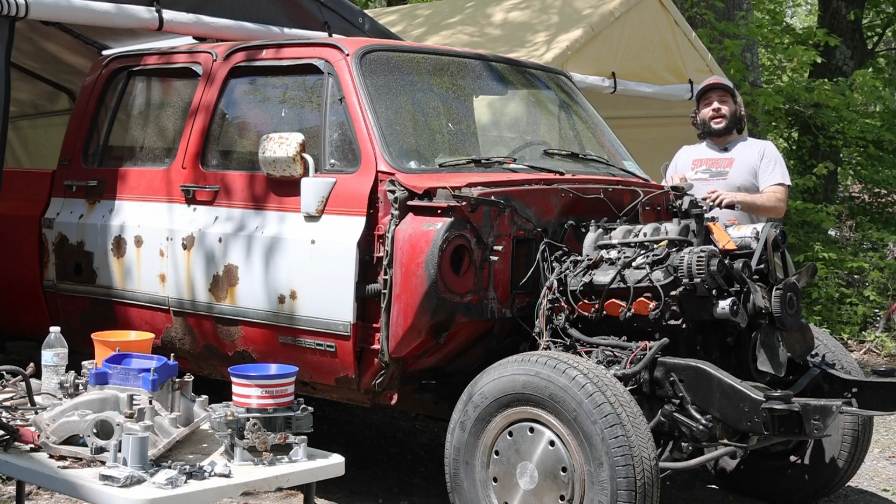In the last video, we were able to get the 8.1 liter Vortec and Allison transmission into the actual truck itself, but unfortunately, we weren't able to get the transmission bolted in. It clearly was not meant to be in here, but that's okay. What we're gonna go ahead and do is finish pushing this thing out of the carport, and we're gonna go ahead and design and manufacture our own transmission cross member for the Allison 1000.

That being said, it rolls pretty easy. Sort of. Oh. There we go. Yeah. There we go. It's going to be a pretty quick and painless endeavor, I say now.

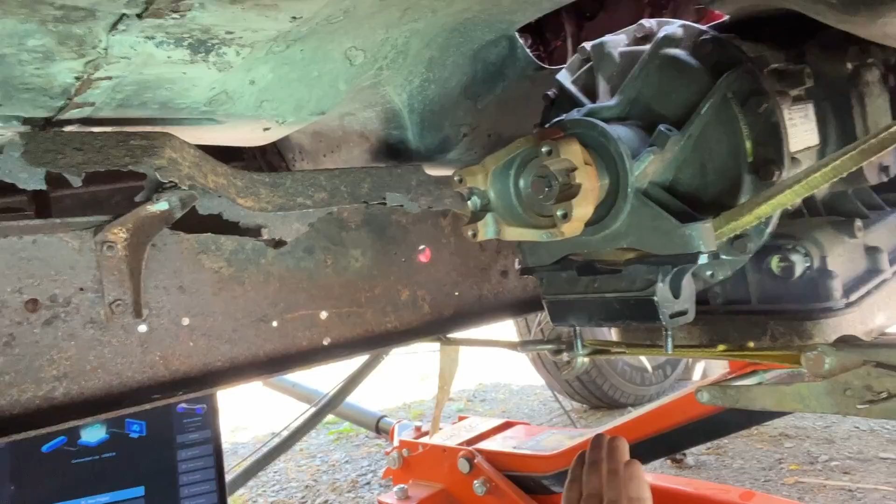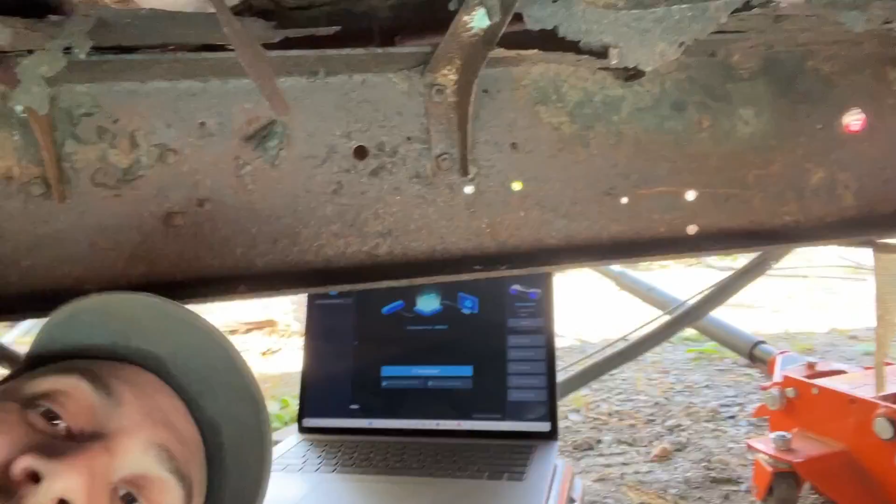All right, guys, we're underneath, and as you can see, we have the transmission sitting right there and a computer sitting right there. I actually had to steal the wife's laptop because my laptop for tuning computers can't do scanning. It will literally freak out. So I use my desktop for the actual designing process, and for scanning, shout out to the wife for letting me steal her laptop.

Anywho, here's an old trick that I learned back, I don't know, 20 years ago from an old timer. Take a ratchet strap to support your transmission so you can move the vehicle around and everything. But yeah, if you didn't know that, that's how I do it. Now that we're going to be taking stuff off and everything, you just, you know, secure the transmission.

Anyways, so the first thing we're going to go ahead and do, now I had a lot of troubles with this. This is the Creality Raptor, just the standard Raptor, not a Pro, nothing like that. And this does both laser as well as LiDAR or infrared scanning. Now, for smaller projects where you're trying to reproduce a part or something like that, the blue laser is amazing. The accuracy, so good.

Now, again, this is not an endorsement per se. I bought this with my own money, and I had an absolute nightmare to get the thing working. It took 2 days, and I had to go to my mom's house and use an Android phone to do an update on it because out of the box it doesn't work. So hopefully they fixed it. I mean, it was a problem that was known for about 3 months.

So if you're buying a 3D scanner, this is awesome if you can get it working, but be prepared for a headache. They do make other ones, and there's other brands. Now, there was no mention about it on their website, and it was the forums that were able to get the problem solved. Heads up. Anyways, we're going to go ahead and create a new project right here.

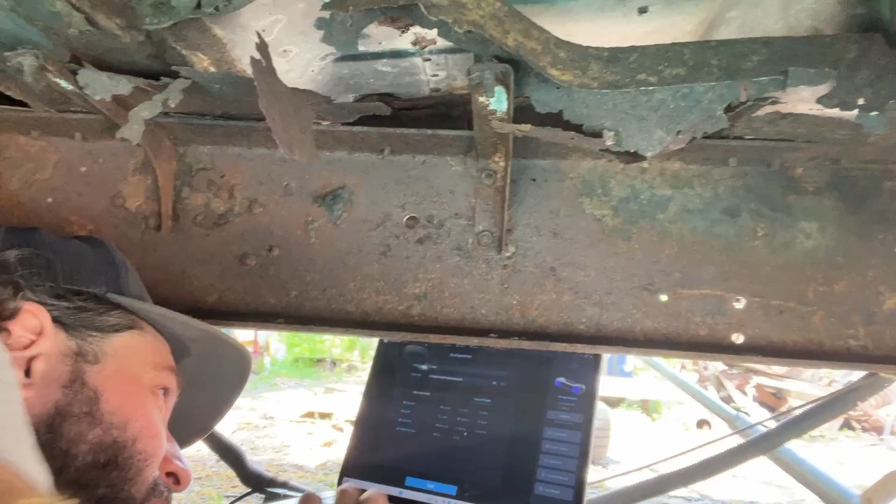We're going to call it trans. There we go. We're going to move over to this thing. Oh, and we're going to use the infrared mode. We're going to do medium, no markers, geometry, and disable the flat base. The flat base is designed so if you're scanning something on the floor, it won't read the floor. That being said, don't enable it.

It is buggy as hell. It doesn't work, and it will make trying to scan anything an absolute unmitigated nightmare. So make sure it's disabled, and we'll go ahead and start the scan process. It'll initialize, take a few seconds, and you're going to be able to take the scanner. Make sure you use the little hand lanyard thing, because if you drop this thing and it hits the ground, it'll mess with the calibration.

And you can see we put that towards the transmission. This is actually up, so you put it towards the transmission, and you can start seeing that the green is good. Green means it has a nice visualization on range and everything, and you'll start being able to scan it. Now, to start scanning it, you press this little button once you're happy with what the color is. And I'm using my phone to actually see that, and now it will start to scan.

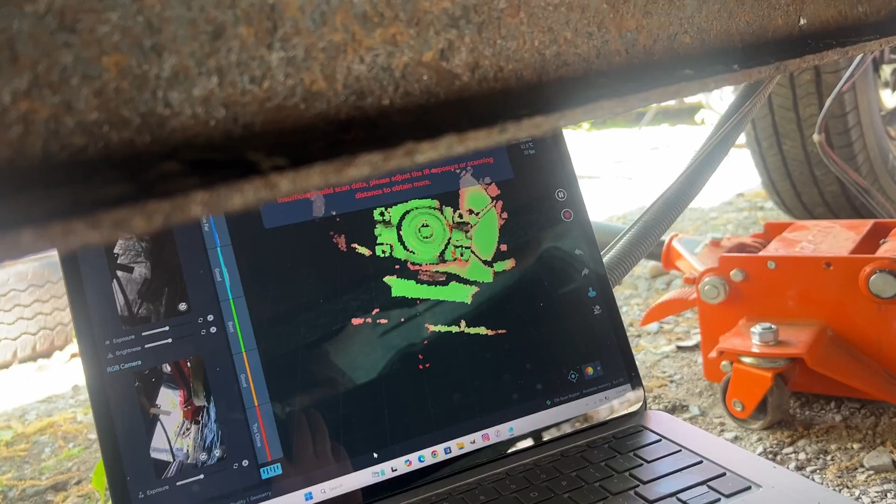This is inverted. It's weird, and it does a really good job. I've been using it for doing the super stuff. And let me turn it around so you can see. All right, this is a little bit difficult, but you can see what I've already scanned. And if we look over here, pull far enough back, you can see the color change on where the little play button is. Once it gets in a nice position, it will change the color. If you're too far away, it'll turn all different colors, right?

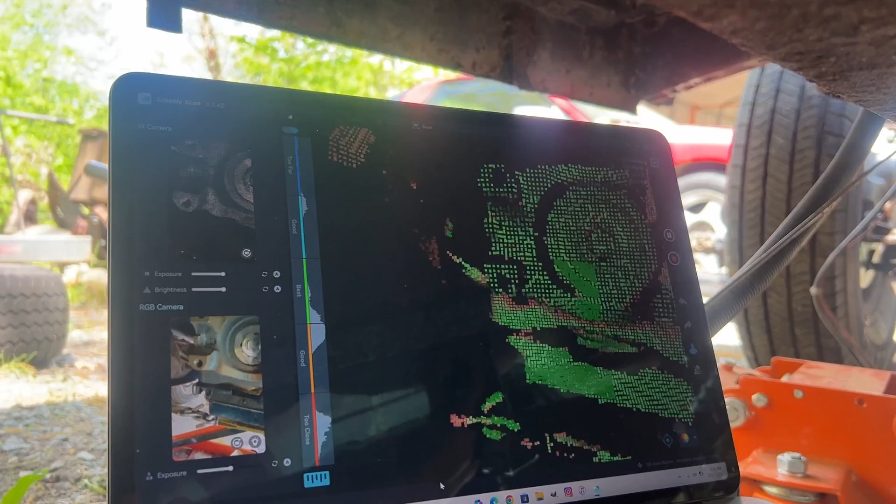You can zoom in and increase how much information you get based off exposure and stuff like that. So if you're watching over here, it'll physically zoom in like you're zooming a camera, so you can see what you're doing a bit closer, but this has to be further away, you can do that.

You're going to start scanning the whole thing, and you want to get as much detail as you possibly can, changing the angles, because you're literally creating a 3D representation of the entire thing. It'll yell at you a bunch, but you get the general idea. It's probably going to take about an hour to scan everything, since it's a bit finicky.

Once I'm done scanning it, we'll go into the house, upload it onto my desktop computer, and we'll be able to render it out and use it in a CAD program. Once we have the CAD program open, we'll be able to design the actual geometry, and from there you'd be able to run it through something like a plasma table.

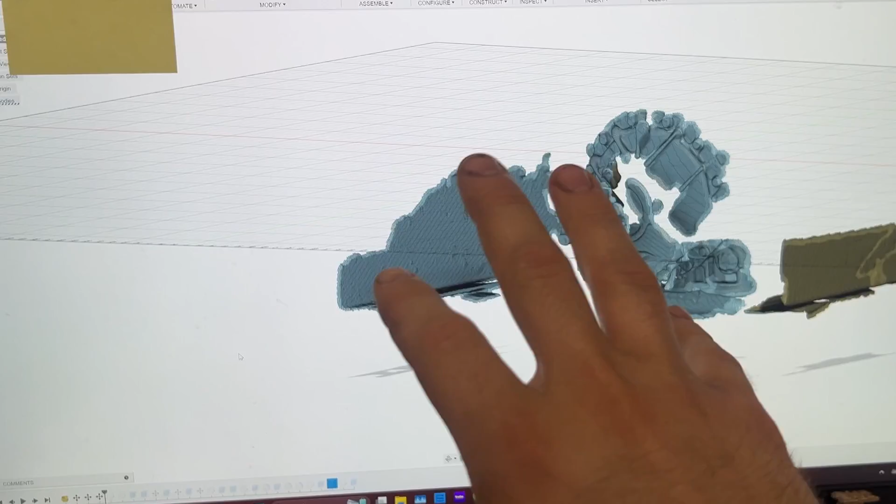We are not that fancy. We're going to go ahead and get the grinder out and just do it the old-fashioned way. So forgive me for not having capturing software, and also how can you see my hands when I'm doing stuff? But this is the environment that you're going to be working in.

You can kind of scoot it around by grabbing it. You can use your shift, and you can manipulate the screen and really get a good idea.

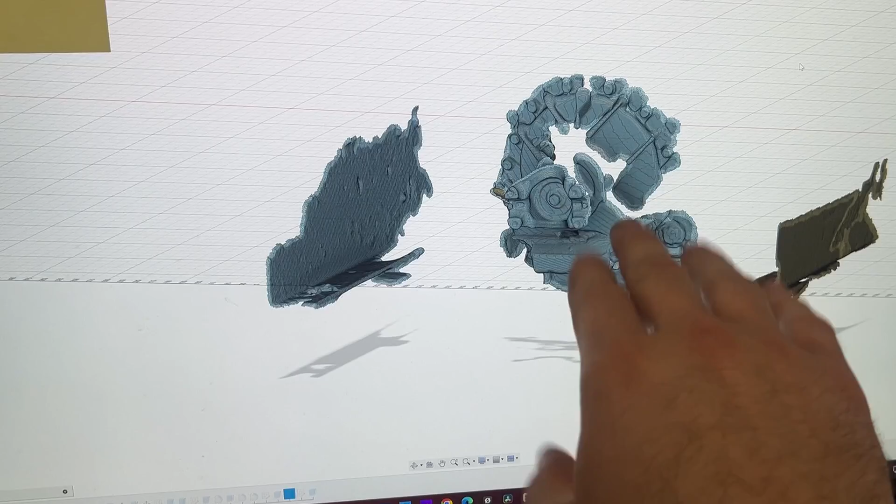This right here is going to be our frame rails. So your C channel is like that, but we just needed to have those surfaces so we knew where we're going to be mounting it. And there's our transmission mount right there. We needed the other stuff so we knew what we were going to hit and what we're not going to hit, and then we can start playing with different ideas as we go.

First thing we're going to want to do is draw the tube. This is where we're going to be able to mount our brackets to, and this will give us an idea how close we can get to the transmission mount.

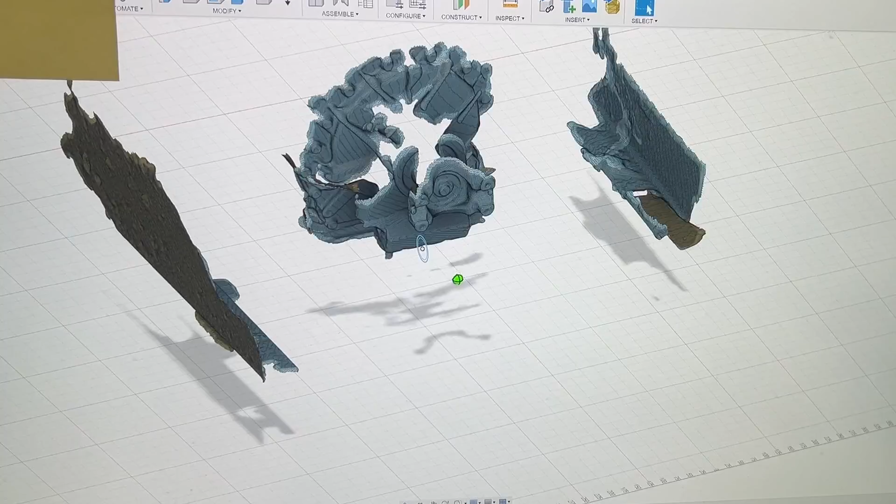If you want to see how that looks, we can actually open up that drawing here, and we can go ahead and hide the mesh from that and really get a good idea.

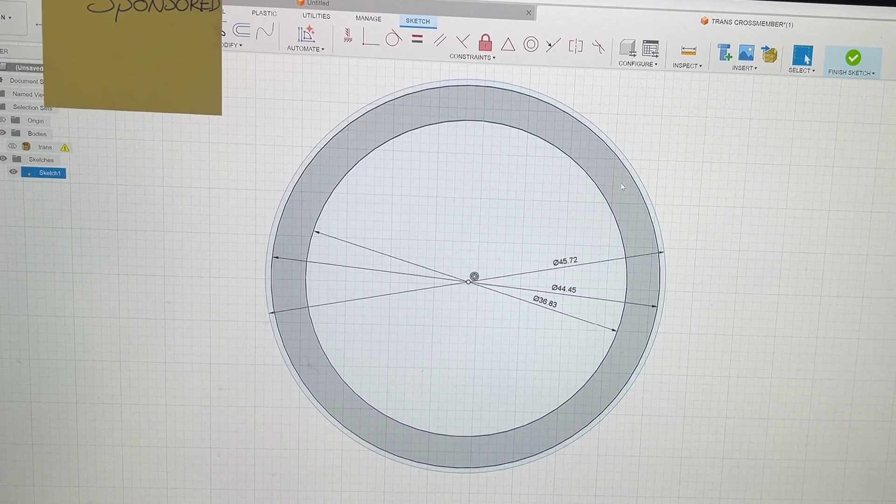So we have three circles. The inner is the inner wall, so this is the void, if you will. This is how thick the actual tube is, and this is a little bit of extra space to allow you to put the tube through the plates when we get to it and weld them in, so that you're not a friction fit. You don't need this to be friction fit, you need to be close enough for a weld, but not nuts. You know what I mean?

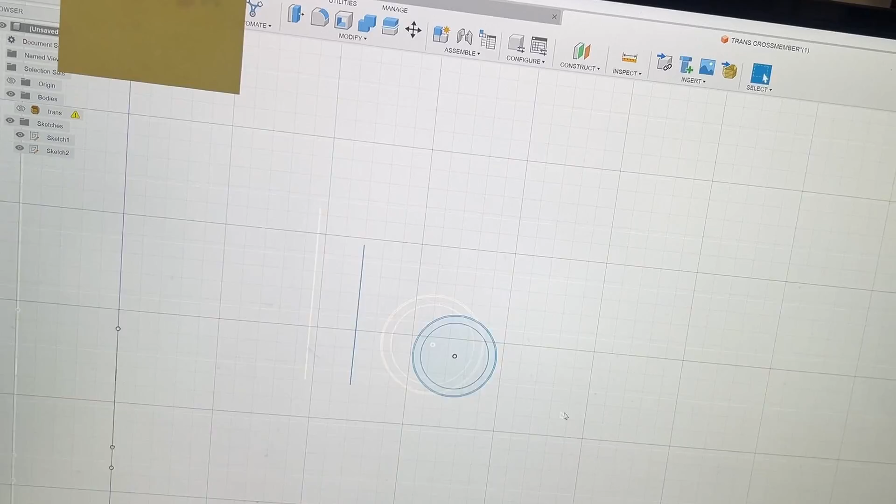Now we can go ahead and exit that sketch and get an idea of our next sketch, which we can zoom out, turn it around, and that is where we create our plates that go to the frame and the plate that goes to the transmission.

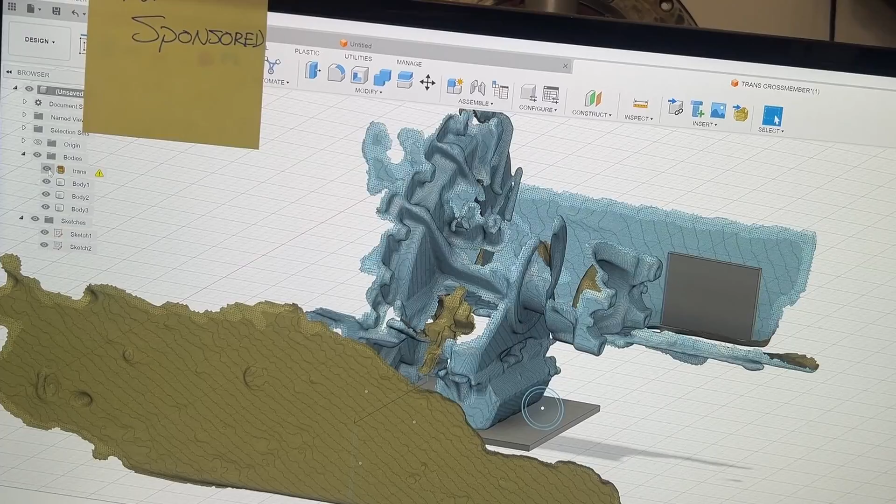So what you can see when we turn that into an actual solid on our extrusions, that's what it'll look like. And again, to get an idea what the space looks like, those are the most important parts. We have our plates and we have our tube mocked up.

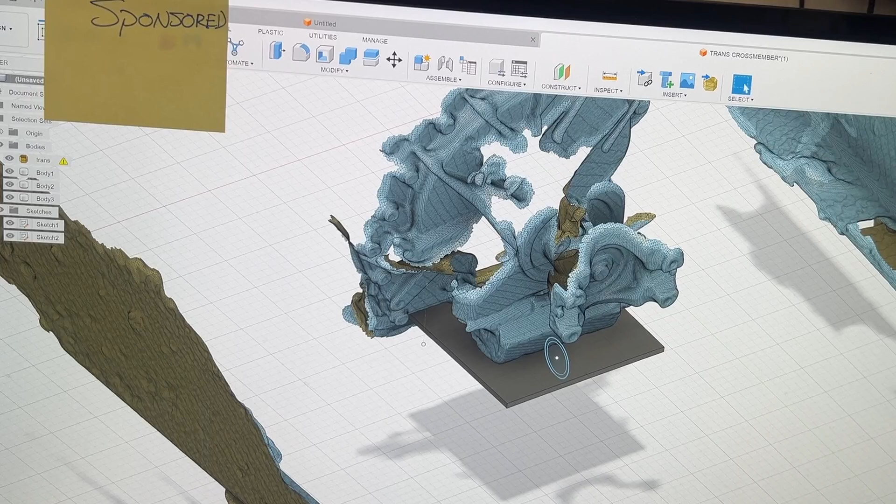From there, we can just move things around until we're happy, making adjustments. We didn't need it so tall, so we dropped it down. Scoot this over a little bit more. And you can start to see things kind of come to fruition.

What we're creating here are the gussets that are going to support the lower bracket from the tube. We can then extrude them, and that's what they'll look like. Now, we don't need that much material, so we can kind of just shave it down a little.

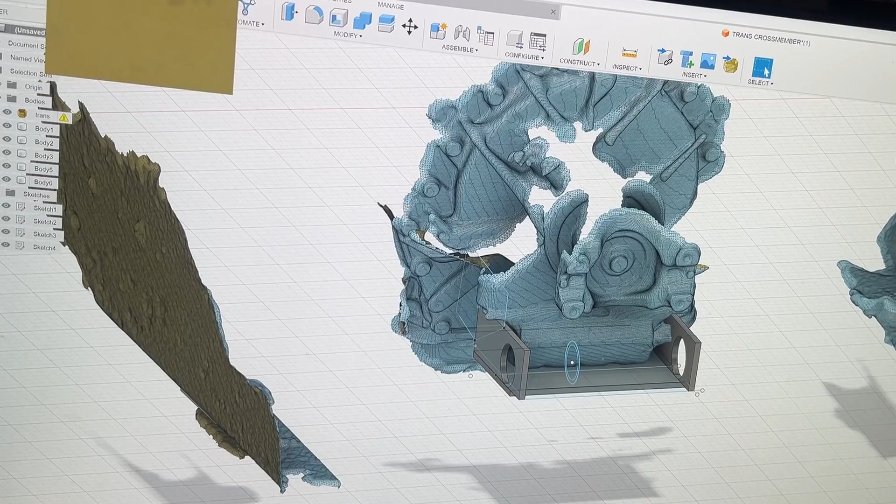Again, you put a drawing, and to show how you create a drawing, we'll just scoot this around and I'll give an example. So you select the face that you want to draw our drawing on, and select the draw thing, which is up over there. This is not sponsored. And you can actually hide the body again up in this corner, put that little eyeball, poke it right in the eyeball, knock it there, it's blind.

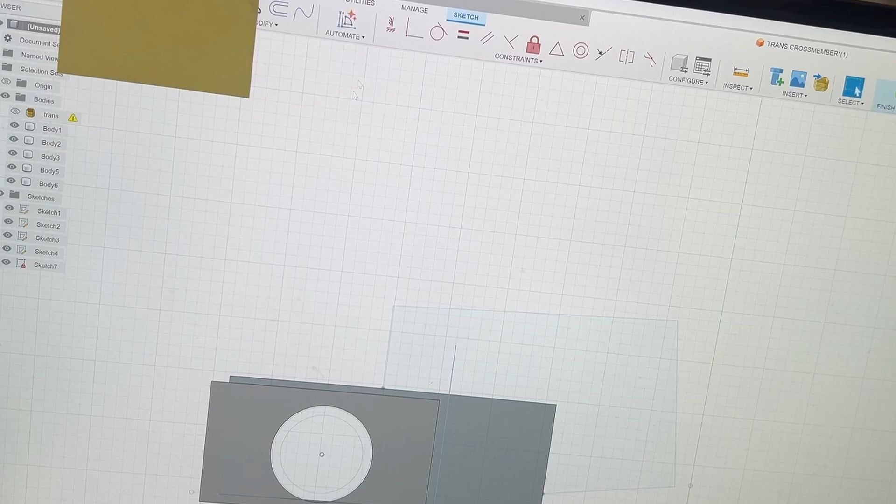Can't see what we're doing. And then you just draw our lines. So you can do all kinds of fun things. You can explore the program. There's plenty of things. This isn't a tutorial on this. This is just to let you guys think, hey, let me get in and do this stuff.

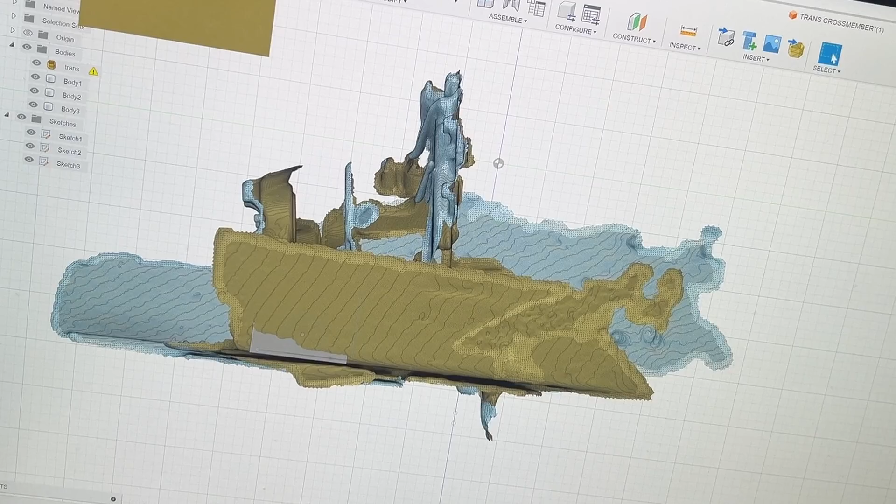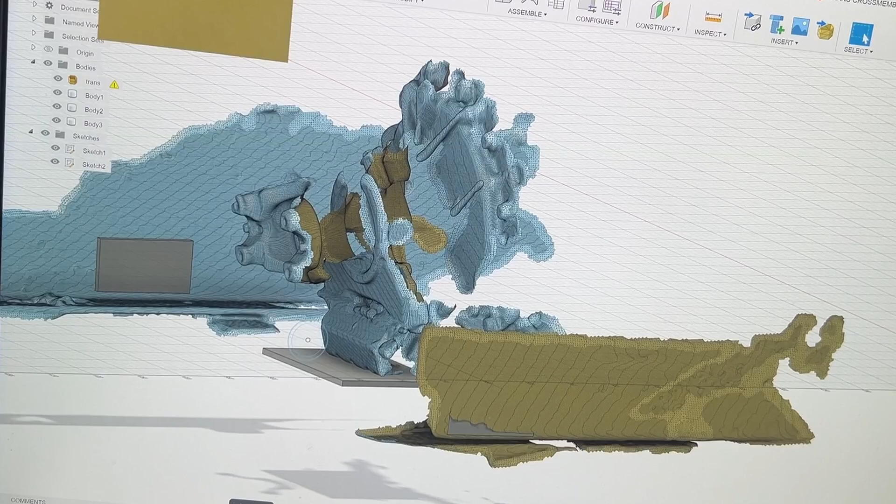So we'll exit out of the drawing because we don't need to actually do any more drawings, and we will get an idea of the next phase of our creation, if you will. So let's open this back up so we can see our constraints, what we could hit. And once we're happy, we can then, so that's right, I trimmed that down. We went back too far. There we go. So that punches the holes in it, right?

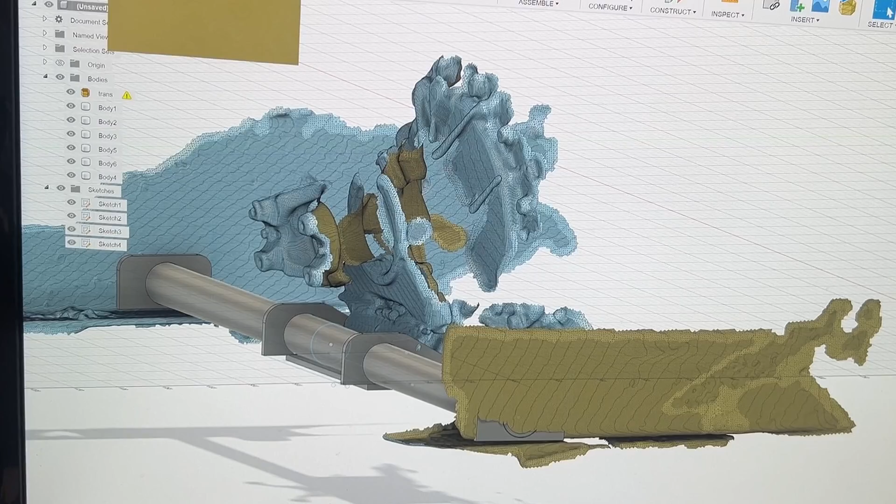That creates our little angle of the dangle to remove some of the metal that we don't need. Just, you know, make it look nicer. I didn't end up doing that for my cuts, but it does make it look nicer. And I did leave one thing out so I can show you guys once we get closer to it.

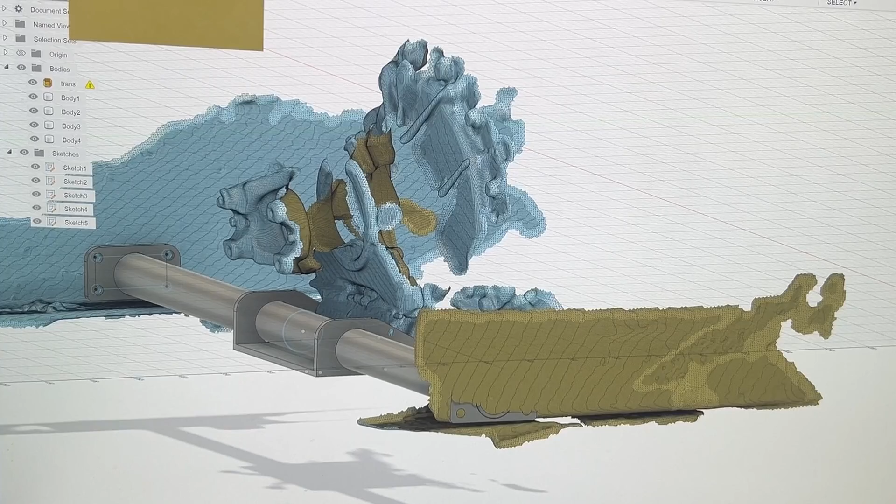Oh, there we go. So my initial drawing for the plate was not long enough. So what I did was I actually used the extrusion tool and I extruded this out till it reached this face here. And that gave us a nice plate. And the last part was to create our drawing for our transmission. Now, in our drawing, it was pretty straightforward.

You have a part of the transmission mount sticking through. The other one didn't scan very well, so we don't have that one. But we know where this one is, and we know that they're symmetrical. So we create a slot so that when the transmission mount goes in and then pivots up, it has room. And you can adjust it as you need it. And then what we did was we created a reference line right here, and we used the mirror tool to flip it to there.

Oh, and real quick, what we end up doing is once we finish the sketch, we then use our extrusion tool again to then punch the holes out. Now, the really cool part about it is you won't have to sit there and make 3 attempts to get it right. Once you have your scan, you verify a couple of the measurements to make sure that your scan is accurate. That's very important.

For example, from frame to frame, it was 33 1/4. I scanned it, it was 33, and I mean, it was off by maybe a 32nd of an inch. So just take that in consideration. The way I did it was the brackets that mount it to the frame, the actual tube goes through it. So it gives you a little bit of wiggle room. This is pretty accurate. Now, me cutting it up with grinders and stuff like that later, that's not so accurate. But, you know, I work with what we got.

Now, if you guys end up wanting me to make these for you guys, then it's different. We'll send that out to a plasma table to have it cut. One, it will be a lot quicker than me doing it, and it will look a lot nicer. I'm really just prototyping it, and I'm the guinea pig. So that's what it is.

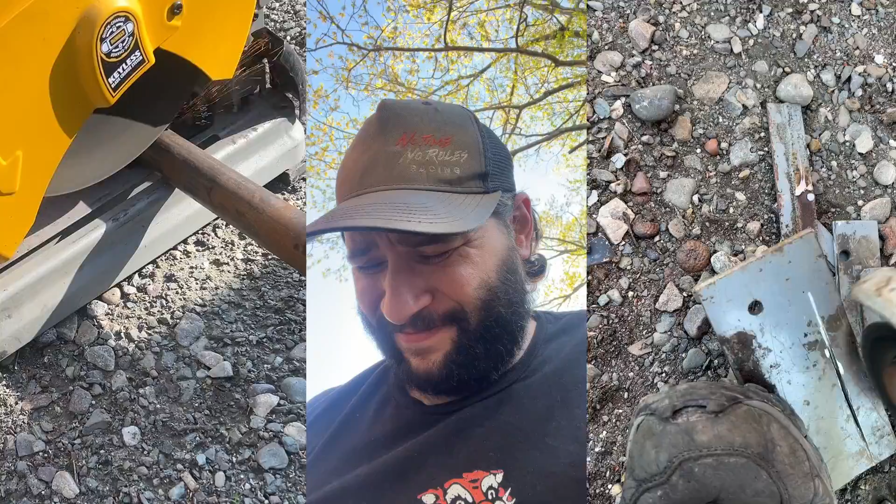Now that we went through the process of scanning the environment, creating it in CAD, and using advanced quality manufacturing processes to develop this right here, you can see that it's pretty stout, as it should be, since it's made out of 1 1/4 roll cage material with cold rolled quarter inch thick steel plate.

Now, this is meant to be more of a prototype. I will use it on this. If you guys are interested, you can actually go to the website, and we'll be able to order this right through there. About a 2 week turnaround. I'll actually have to send it out to have the plates machined out on a plasma table, and we'll weld it together for you and ship it out.

It's awesome. Anyway, we got to get this thing clean with some isopropyl alcohol, or you could use something like acetone, just to get the oil and crap off of it. You've been welding on it, you've been touching it, and all that stuff is not good for paint adhering. Then we're going to knock out some coats of self-etching primer. Light coats, doesn't have to be crazy, but we want to make sure whatever layer we put on next is going to be there for the rest of its life.

Not that I'm worried about this thing rusting away into nothing. That would be impressive. Actually, that would be a miracle. This thing is hardcore. Yeah, it's strong enough to do what we're doing. Anyway, let's get this done.

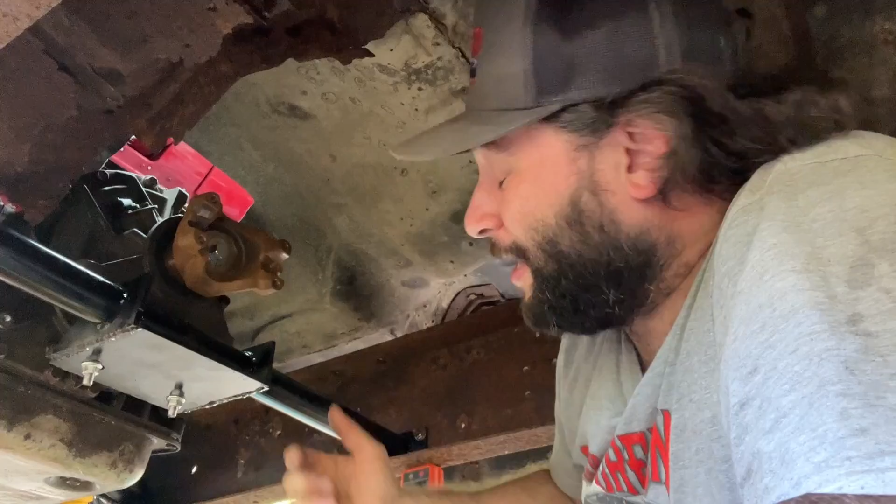So let's go ahead, get this thing fitted in there, and show you how it installs. Now we have to do the obligatory 'that's not going anywhere.' And it looks pretty good, I gotta say. I mean, for almost getting rained on and being a little bit tacky, it went in pretty nicely.

If you want to continue following this project, we have a lot to do on it. We still have to do fuel lines, brake lines, radiator core support. All that stuff needs to be put together. And we need to wire it, program it, and we'll go through how you can do that. It's very similar to what you'd need to do with an LS at this point.